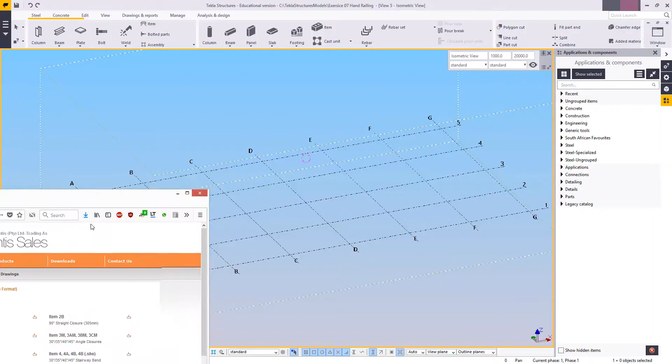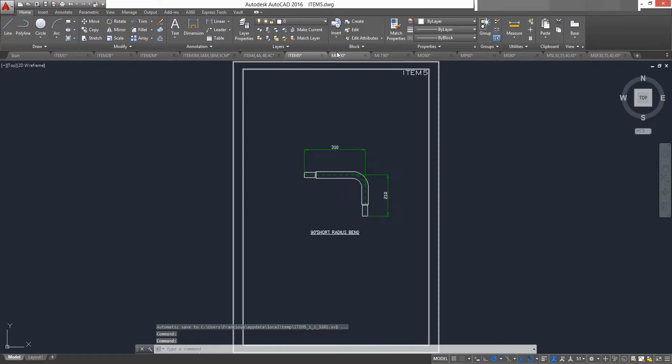went about making this. Now, firstly, I used good old Google to find a website, a local manufacturer of handrailing that happened to have downloadable AutoCAD files of this, and the AutoCAD files look something like, well, these, quite a lot of them, and they're all the different bends and uprights and so forth that we will be using for this project.

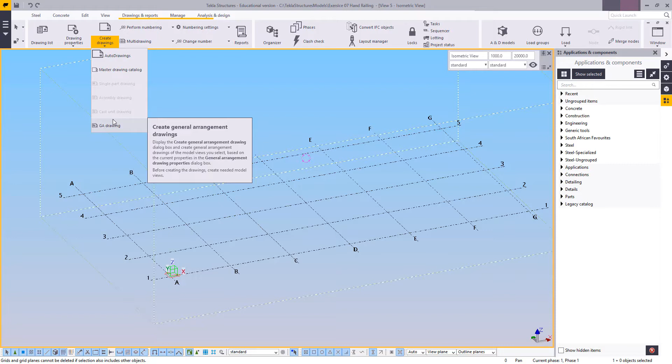The next thing we are going to do is create a drawing to work off of, as we'll need a border, a template, a basic size to fit everything into. And for that, I'm going to create an empty GA.

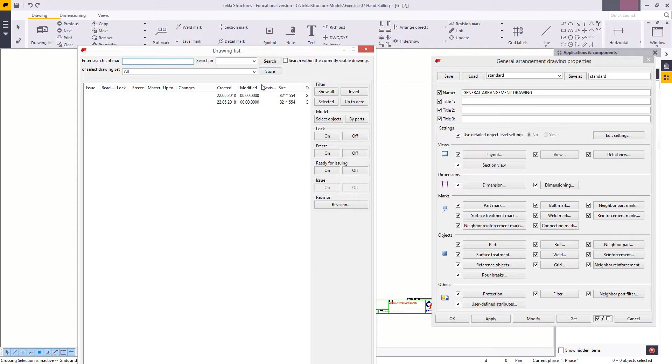And that's it. Now, size-wise, I'm going to set this up to be my preferred drawing size over here, as it'll be the same size as most of my GAs or my assembly drawings. And in this case, I think an assembly drawing would be nice. An A2, yes. So this is the size I'm going to use for my schedule.

And the reason I say that is I would like to use this paper size as a general guide, as well as have an idea of where my cutouts, notes and so forth will be. From this, I'm going to export. So export drawing. Let's see, file prefix, suffix, I don't really care about that. Let's open up the folder. Yes, it has to be exactly inside that.

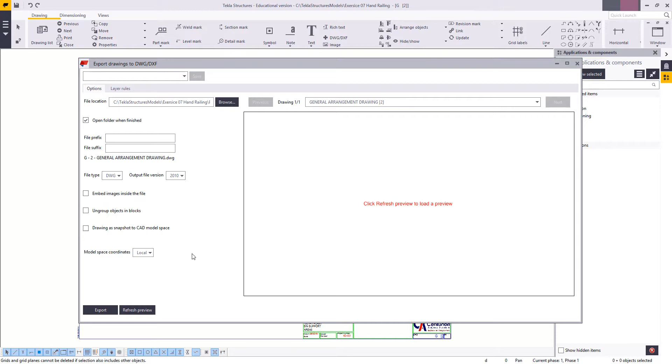DWG, doesn't really matter what CAD format you use, just make sure that it is older than your current version of AutoCAD. And I don't really care about any of the other stuff either. And that'll open up this over here. Now, I've already downloaded these files from the other one, and I'm now going to open up this new one in AutoCAD as well.

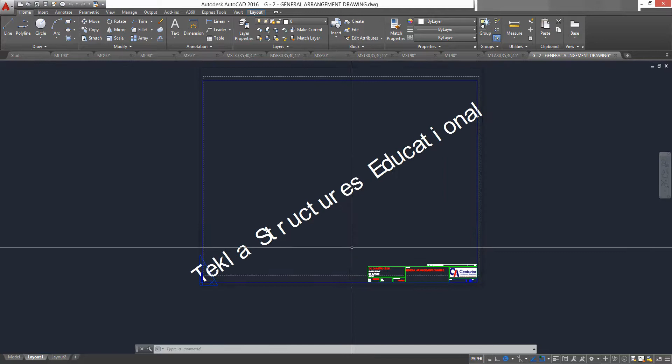The next thing I want to do is get rid of this watermark, as we will be creating a new file to import into Tekla. We don't really want it to put in the watermark, as we'll end up with double watermarks and unusable information.

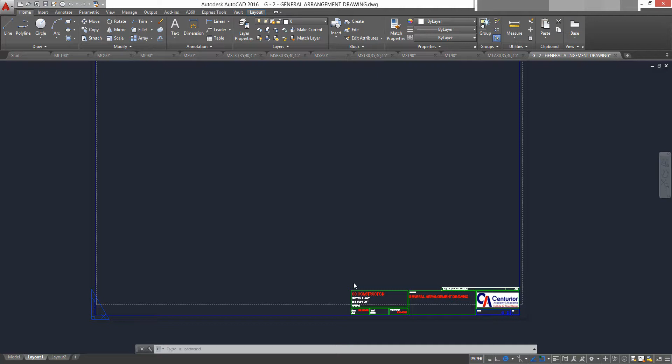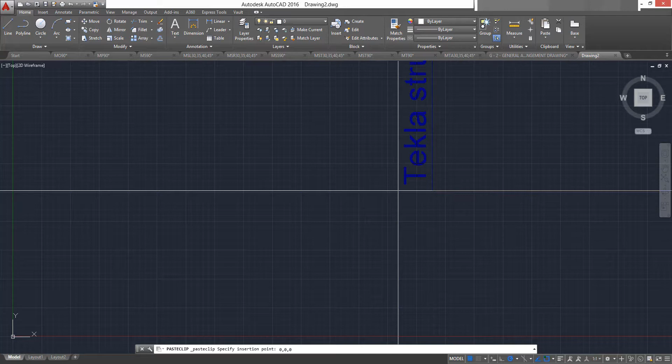Now, as I would like to just use the title block, maybe keep this around for now, but I don't really want it in the layout. I would like it in the model itself. I'm going to just copy this over into a new blank drawing using 0,0 as my starting point over there, and then I can close up this drawing we made. Next, I'm going to go through all of these things and just move them in.

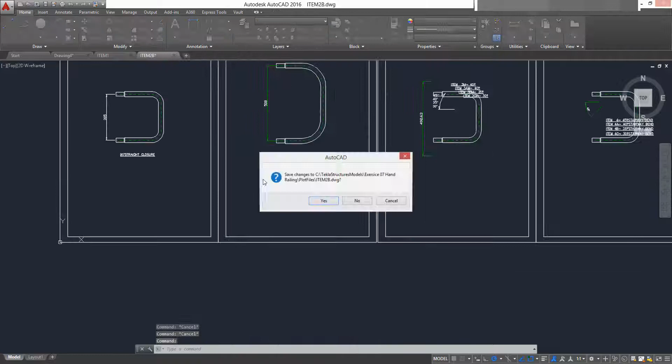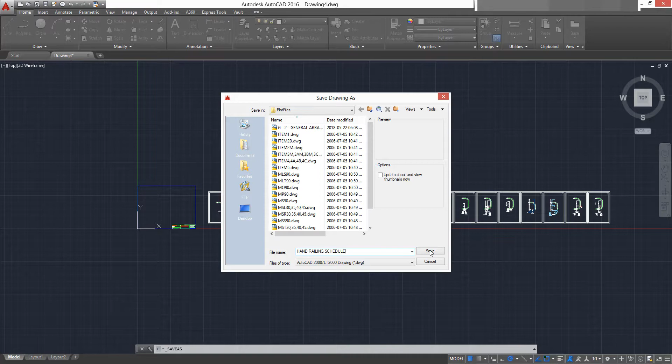Now that we've got everything on one drawing, I'm just going to save before I mess up again. Let's call this handrailing schedule. Now, once that's done, we're going to go through each and every one of them and just make sure they are, well, what we want them to be.

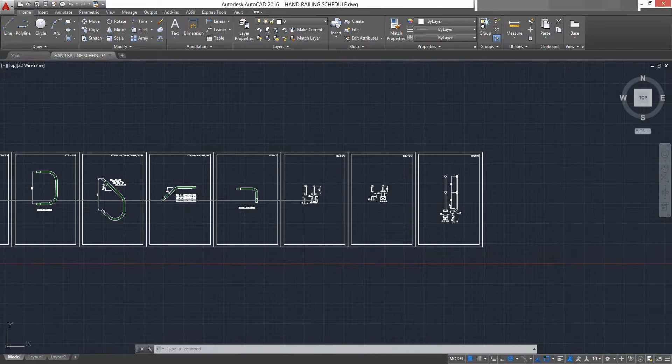Firstly, you'll see that there are some of these that are, well, you could say exactly the same. There's also ones with just small differences, so you will need to go through and pick the ones that you will be using on a regular basis. Now, you don't necessarily have to delete any of the stuff, but you don't have to use all of it.

So firstly, I'm going to leave this one right here because I would like one that shows just the simple pinned connection. They're going to have a small post. This is going to slide over, and that's it. Next, I do need one from the side. So this one here will do. 100 from top. That'll be incorrect, as most of ours will be 70 from top. I'm just going to change that.

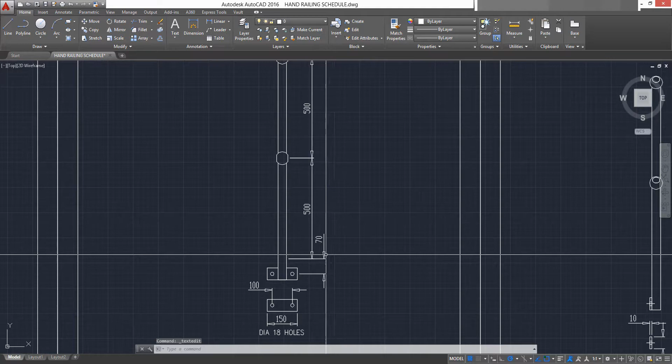And these top numbers don't really matter that much unless you're specifically buying from these people or your client is specifically ordering from this company. You can make a few basic changes to suit a more general need. Now, as for this one over here, it's basically the same as the straight one, except that it's going to be used on an angle, and I think that is going to be good enough.

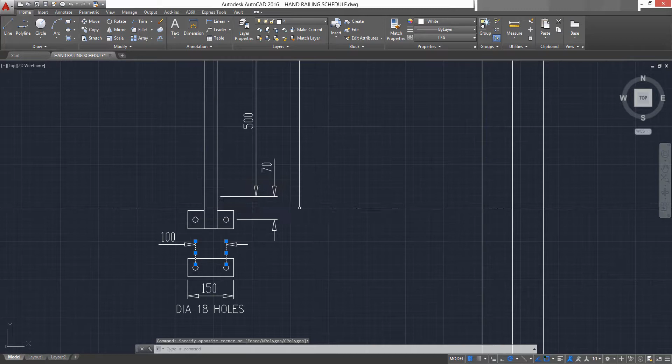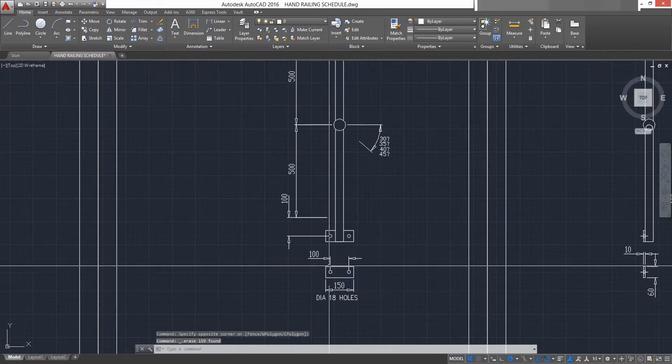I'm just going to take these two lines, move it up there, and get rid of that over there. I don't need to say it's 18 holes, as that is a fair standard for all our handrailing, but you can leave in as much or as little information as needed, not as wanted but as needed.

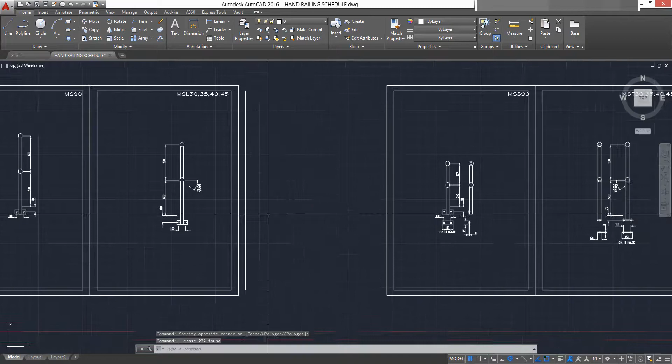And I'm just going to go ahead through all of these and clean up what needs cleaning up. This one, just delete that off the bat. Let's see, shorter ones. These will be for ladders, 75 degrees and so forth. For that stuff, I don't use anything, or I'll create a separate list for those.

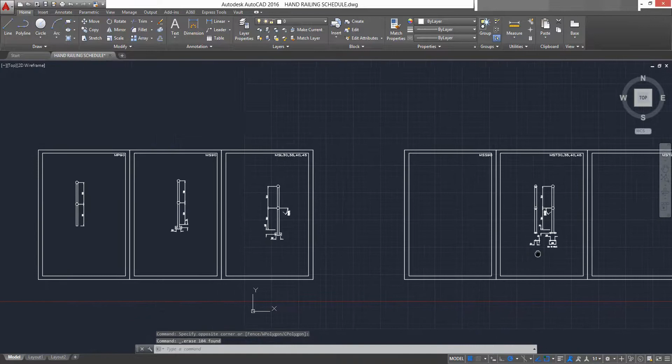As for these, with the top connection, we don't use anything that sinks in. We'll only be using the one that's directly on top of the surface. Let's see, that can go.

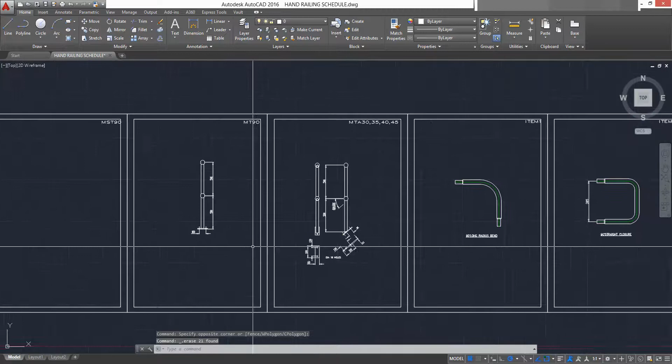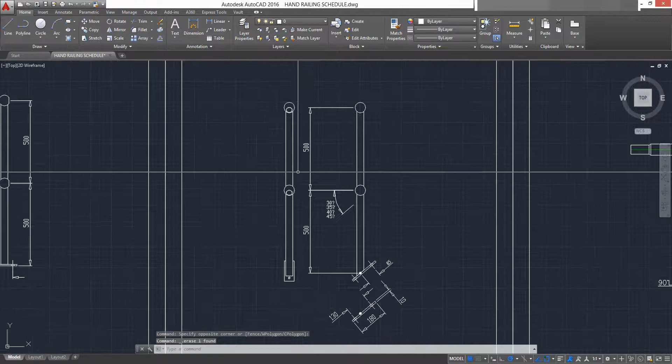This will be the stair stanchion. That'll be 85. It's got 130 total for a 45 at the bottom. That I'm going to delete. And in this one's case, I will be leaving this extra bit of information. Maybe just move it a little bit to the side, easier to see, or I could just add the information to this one over here.

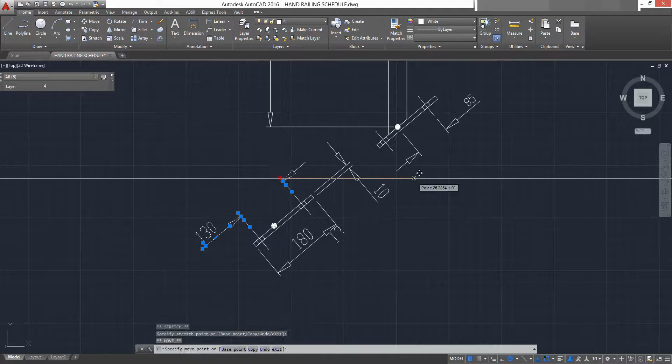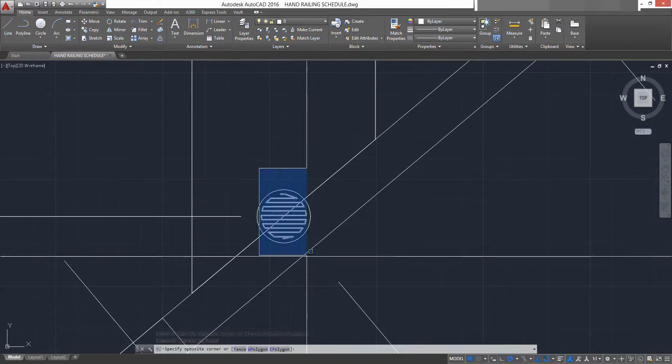For example, I could just take those, add it there, and get rid of this side completely. Again, as little or as much information as you deem necessary for your specific needs or for your clientele.

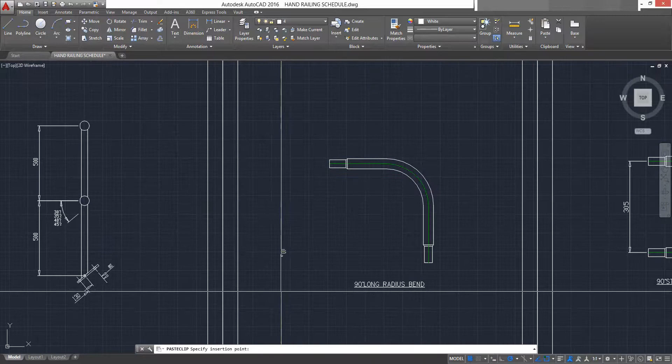Next, these long bends are pretty standard at 300, but there's no dimension, and because I've already exploded it and we've put it on another sheet, even if I put a dimension in right now, it's going to give me a completely wrong amount. So what I'm going to do is take one from over there that I know is correct, or that's got the correct sizes at least, size of arrows and such.

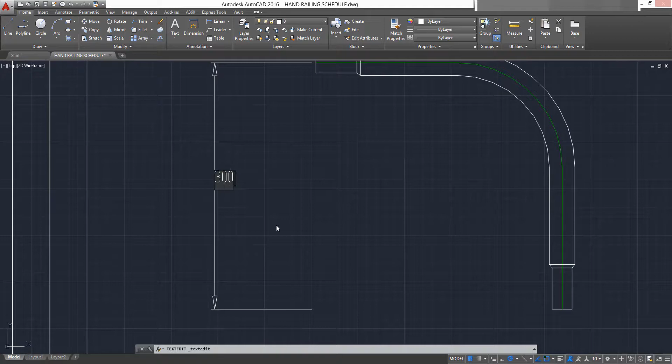To be specific, I'm gonna bring this down right over there. Get that roughly center over there, and as I said, this is going to be about 300, so I'm going to put that in there.

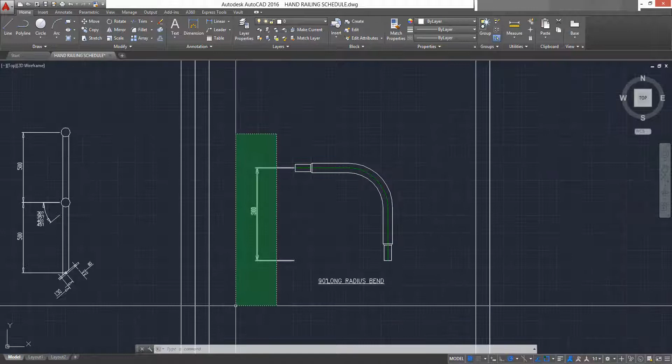Again, this is the small corner made for the smaller handrailing items, usually used on the ladders. Not needed for us. These two are needed. That's a good bend. This is a short arm bend. Now the big difference between the short arm and the regular bend is that this should be about 140, 150-ish. If you are not sure, check the catalogs or go look at the ones provided, see what's average or what's normal in your area, and work from that.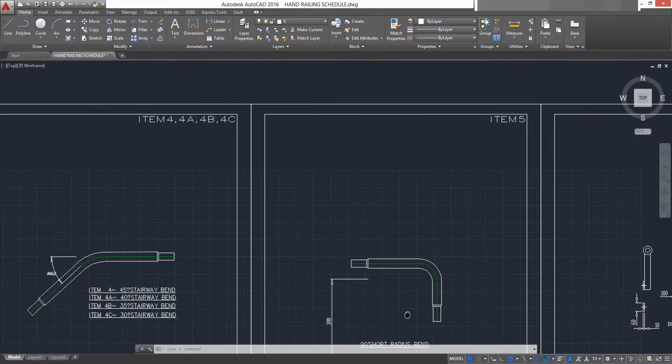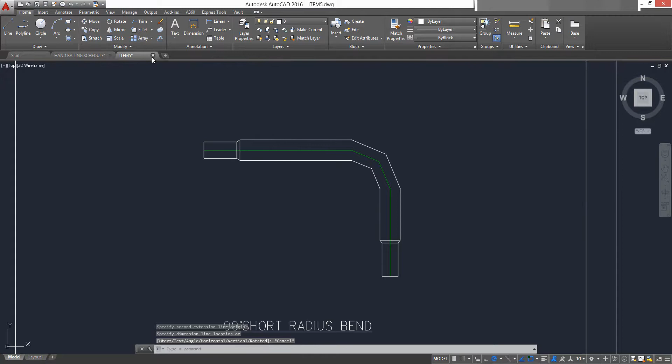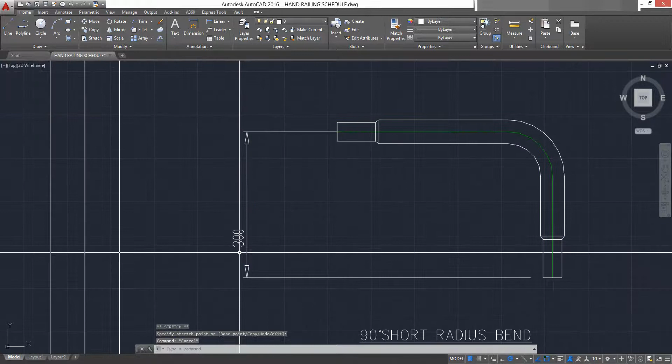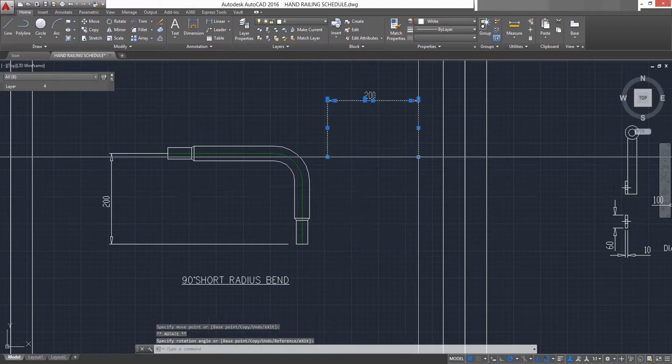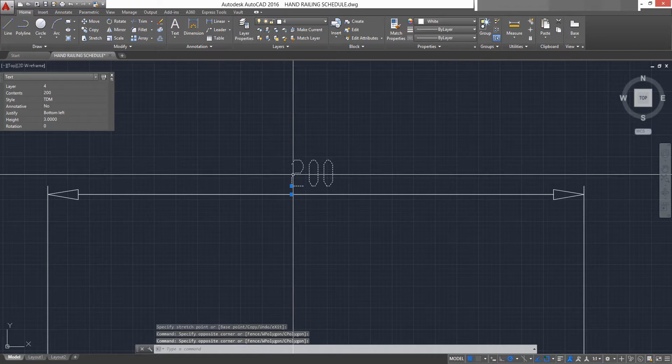Go. This 300 as well. And since we did it this side, I'm going to do Control-Shift-C, get a point over there to copy from, and paste it on the same point as this side will be, well, supposed to be the same.

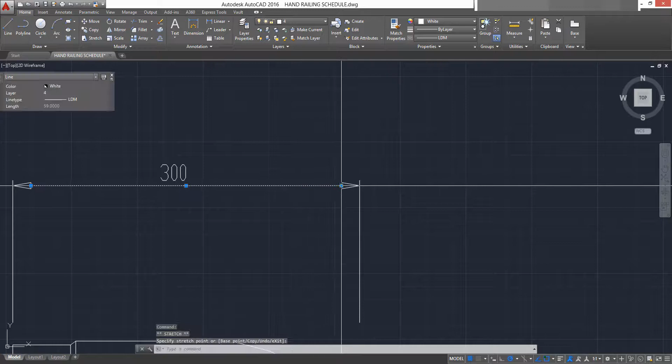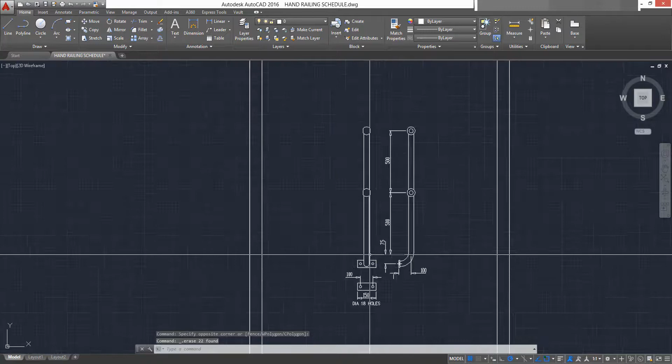Again, a lot of sizes don't exactly match because I needed to explode it so that information will not be lost, as was done the second time around. It's actually the third, or the fourth. I don't remember, it doesn't matter. Okay, so 100 over there. I'm going to leave that one there. Copy that up. That one.

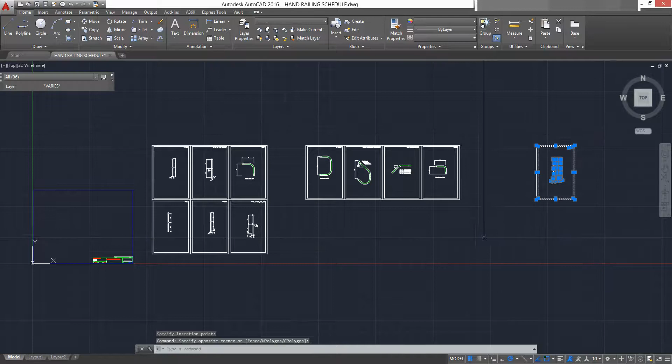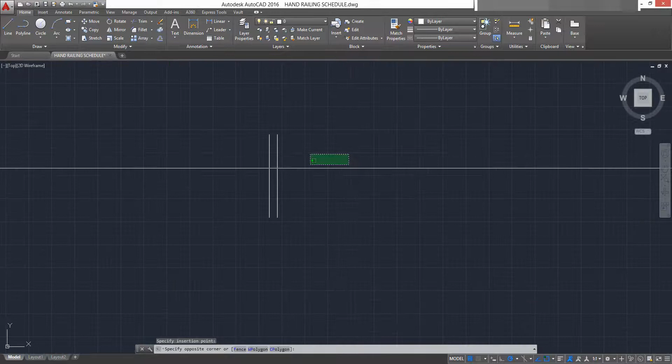So these are the ones that I would like to keep. Name wise, I'm not going to bother with the names as they are fairly generic for my region. Just get them tucked up a little nice and tight. And next comes the layout part. Now, currently we've got a total of 11 parts, and we'll also need one for our general handrailing. So I'm going to pick just one of these. I just need 2 pieces, 2 lines, and I'm going to turn those over, and that's going to represent a standard piece of handrailing.

Next, I'm going to have to bring these all a lot closer to each other in order to get a layout that will fit inside this block. I'm also going to need to create a nice space for text where we're going to fill in our amounts when we're doing our schedule.

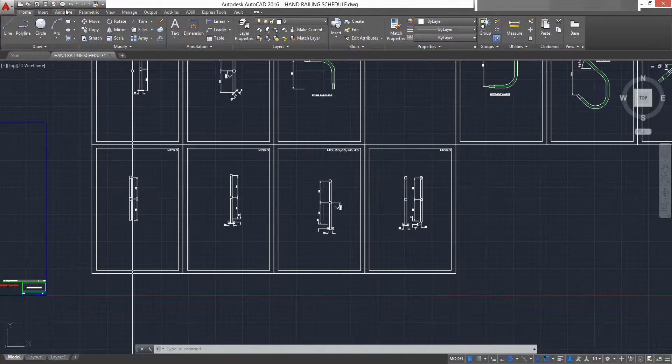So first order of business is we are going to make a bunch of squares. Basically, we would like a block that everything fits into, and those that don't fit, like this might be a little bit big compared to the rest of the stuff, or all of these bends are actually a little bit big, we are going to scale down, make it a little bit smaller, more or less the same size as these, so that everything can fit into the same space.

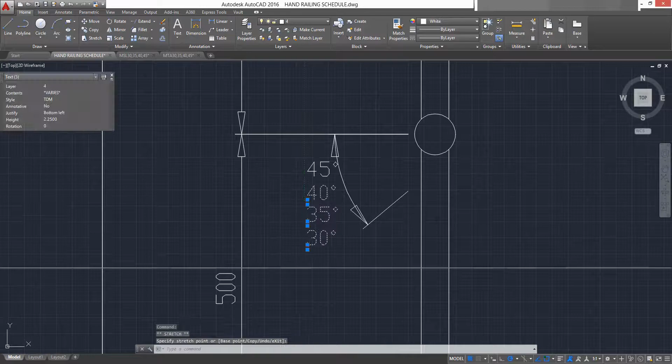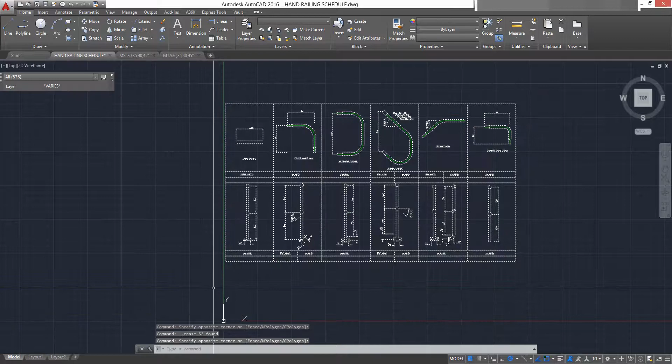Now, yeah, this looks about right. While still quite far from perfect, this is roughly what I'd like. So I'm going to take everything and just cut it with Control X, paste it again with Control V, and then type in nought, just to get it right here down in the corner at my 0 XY position. Once that's done, save this.

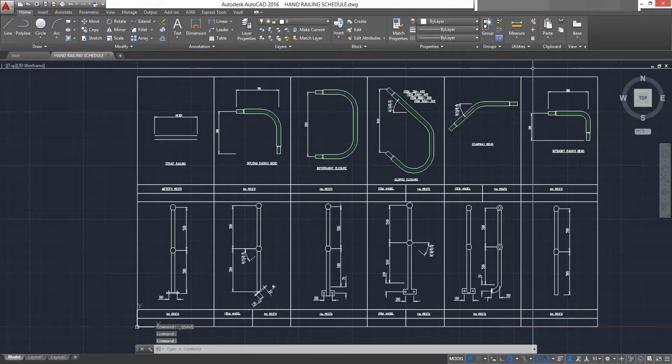Close these extras, which I didn't really use, and can close this. Leave it for coming to the plot files. I can delete everything except the handrail schedule. Just skip all those. Handrail schedule, I'm going to copy, stick it inside my model. And let's get back to Tekla.

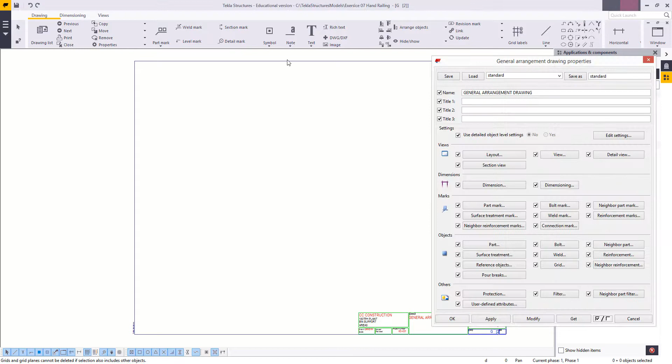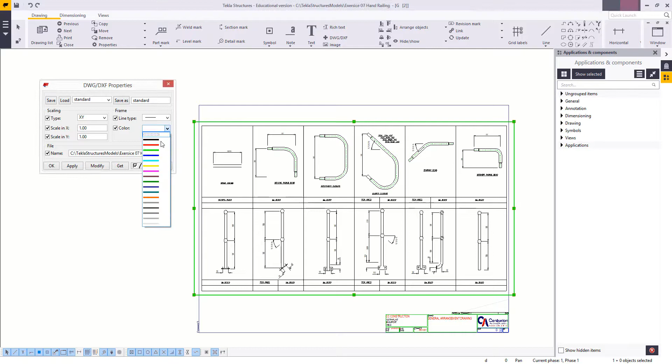Now, when you're doing a handrail schedule, we're simply going to bring it in. So look here, handrail schedule, apply, stick it somewhere, and as you can see, it fits just about perfect, like we worked it out to do. Now, this green line around it will of course always be a little bit bigger and will come with, and we are going to change that to this one over here, which is the non-printing layer, and it works just like our normal views' outsides.

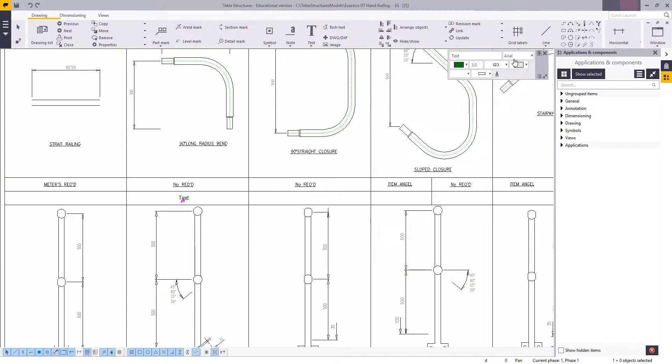And now we've got a nice looking schedule with all our different bends. To use it, we'll simply just lay down a piece of text, and we can type in our amounts or our numbers there. And that's it for this. Now, let's get back to our handrailing.